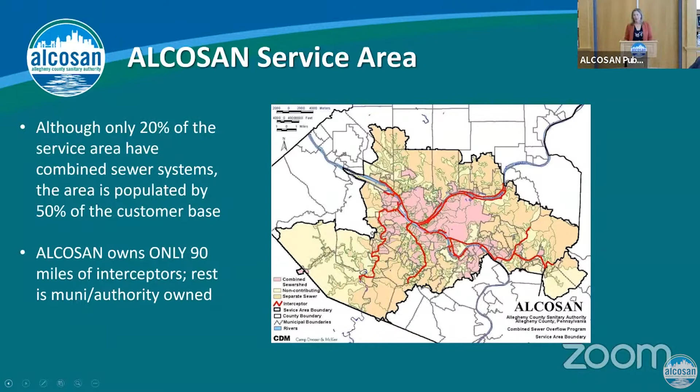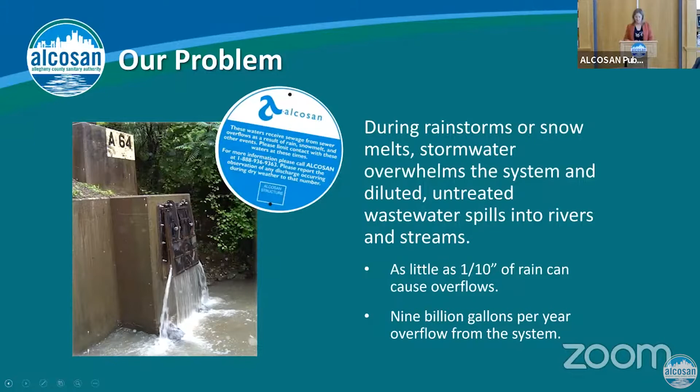Now you'll hear about our consent decree. And what does the consent decree require ALCOSAN to do? Well, it requires us to eliminate sanitary sewer overflows, and that's an SSO. Those are discharges from sanitary sewer systems. It requires us to reduce combined sewer overflows. Those are sewer overflows that are associated with combined systems.

And then it also requires us to continue to provide transmission and treatment for all of our customer municipalities. That is the crux of what our consent decree requires us to do. We have to capture those overflows that are now currently going to our rivers and streams.

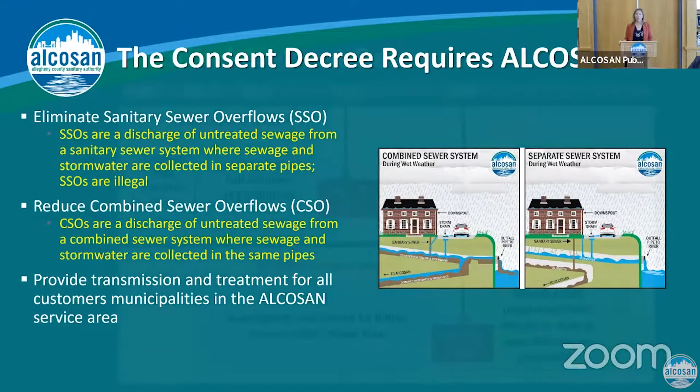And here is an overview of where we were during the original consent decree and then our modified consent decree. So we did have a consent decree in 2008, which would have required full compliance by 2026. ALCOSAN went back to the table with the agencies and we negotiated a modified consent decree. It bought us an additional 10 years. So now we have to complete this first phase by 2036. And it also includes some adaptive management provisions that are very important to our partner customers and municipalities.

There will be additional work after 2036. We are not going to be able to capture all 9 billion gallons with this first phase of the Clean Water Plan. So after we finalize this first phase on December 31st of 2036, then we will develop and implement the final measures plan beyond that date.

So you hear the modified consent decree, and then you hear the words Clean Water Plan. Well, the Clean Water Plan is our plan to meet the regulatory requirements of the modified consent decree. That's all it is. It's our plan to move forward with compliance. And it's actually been split into 4 pillars, which you'll hear much more about today during our annual update.

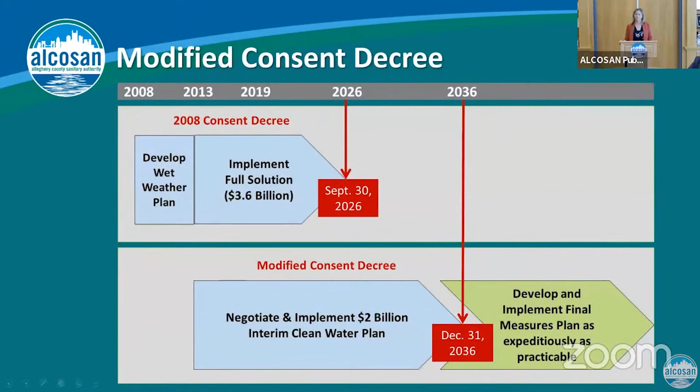Okay, so there's the plant expansion. There's the regional tunnel system to convey more flow to the plant, store and convey it for ultimate treatment. There's regionalization to help free up some of the burdens of each of our communities owning their own collection systems.

And then there's also green infrastructure, source control, and GROW grants to help communities get some of that unwanted water out of the systems that is causing some of the overflows. And remember, we also extended our completion date by 10 years and included provisions for adaptive management.

So with that, I would like to now turn it over to our Jeff Ardros to talk about the plant expansion and what we've been doing down here at the plant.

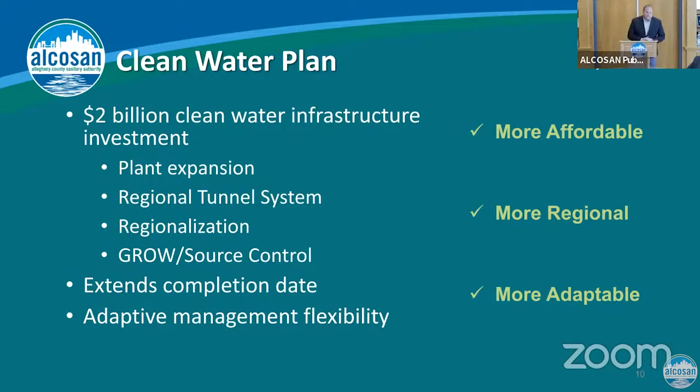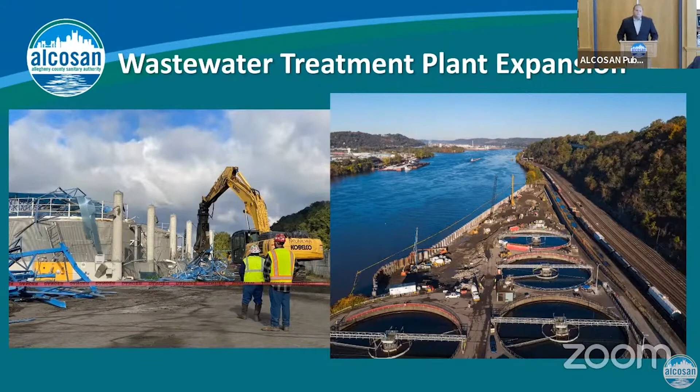And then the other item is providing 600 million gallons per day for wet weather capacity. And that number is 600 million gallons. As I said, our existing flow is 250 million gallons. So we're actually more than doubling our wet weather treatment capacity. And that consent decree milestone is due by 2029. So we will be doubling that capacity in the next 8 years.

Actually, not yet. Sorry. And the other reason I like showing this image is because it really highlights one major obstacle that we had to experience throughout this entire phase of the plant expansion, and it comes down to availability of space. So this is the extent of our entire property, and you can see on the east side, which is the bottom portion of the page, that is the Norfolk Southern Railroad. So we are bordered on that side by the railroad. On the west side, which is the upper portion of the photo, is the Ohio River. We're bordered on that side by the river.

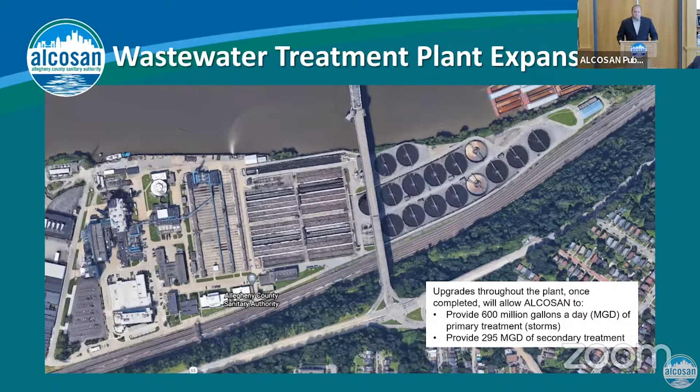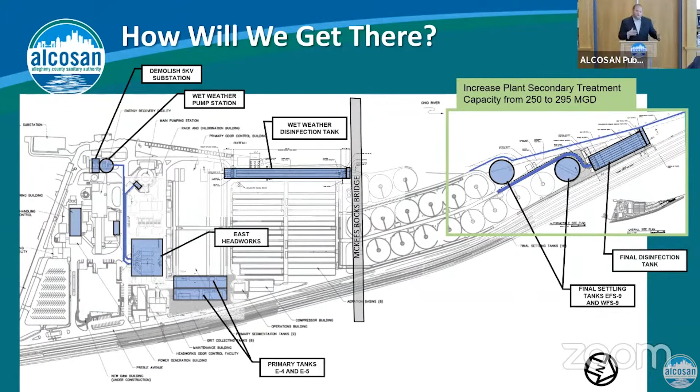So how will we get there? It boiled down to two bullets, but we have 4 steps. It starts with our north end plant expansion. And that will increase our secondary treatment capacity from our existing flow of 250 million gallons per day to 295 million gallons per day. So if you've heard of the north end plant expansion on our social media, or if you came out to the ALCOSAN open house and stopped by our booth, you would have likely heard about this project. It breaks down to 3 process tanks and then a river wall.

Next is our East Headworks project, which is another project that if you came out to ALCOSAN's open house in 2021, you likely heard about. And we will talk about both of these projects in the next slides. Next is what we call our CSO Bypass and Disinfection project. That is going to complete our ability to treat 600 million gallons per day through our existing chlorine contact tank. And we are going to be converting it to a bypass chlorine contact tank. And then finally, that last push is going to finalize that jump to 600 million gallons per day of wet weather capacity by building 2 new primary tanks and a wet weather pump station.

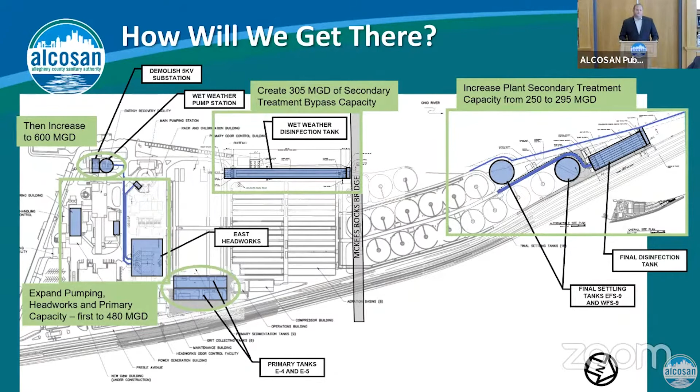So you can see it's about 1,000 feet linearly, and it's made up of 108 king piles, which are essentially pipes that are anywhere from 60 to 72 inches. So if you turned it on its side, I could stand inside one of them, and then there were 108 of them to build this river wall that's 1,000 feet in length.

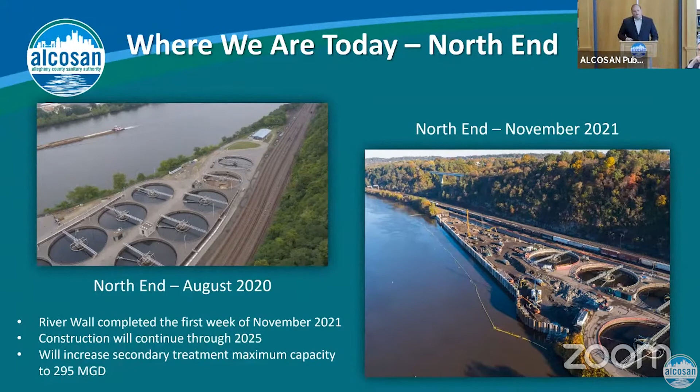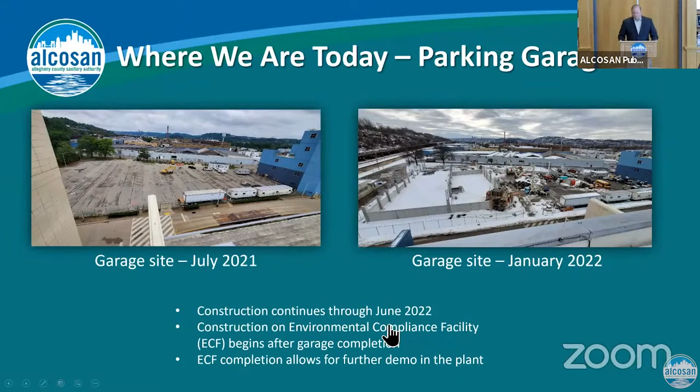A couple other plant expansion project updates. The return activated sludge project. Now this project really boils down to our forward flows are increasing. We're increasing our plant's capacity. So in order to keep up with that, we need to increase the bugs that are being sent back from our clarifiers.

Now, really what I can highlight about this project is if you have poked your head over the McKees Rocks Bridge and you've seen any of that above ground black piping that we have on the north end of our plant, that is the bypass piping associated with this project. So if you've ever wondered what that piping is, it is some bypass piping so that this project can occur.

The electrical distribution system upgrades project. This is a project that just went to construction in late 2021. So we're starting to break ground throughout our plant.

Why this is being highlighted is, again, it breaks down to that same obstacle we've been talking about: availability of space. We have a lot of projects going on, and what we plan to do with this area is locate our wet weather pump station there.

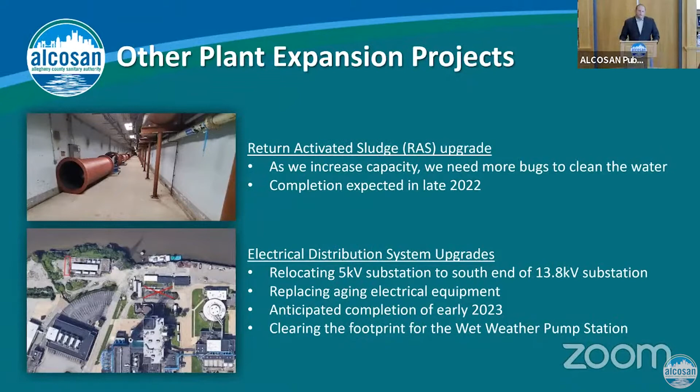You may be asking what the wet weather pump station is. This is going to be an extremely exciting project. It's going to be where 2 of the clean water plan pillars touch. The tunnel is bringing the flows to the plant, and it's going to end at the wet weather pump station. That wet weather pump station is going to pump those tunnel flows up to our East Headworks project, which we already talked about.

This project, we are going to be bringing a designer on board come early 2023 with the anticipation of hitting that consent decree requirement of 2029.

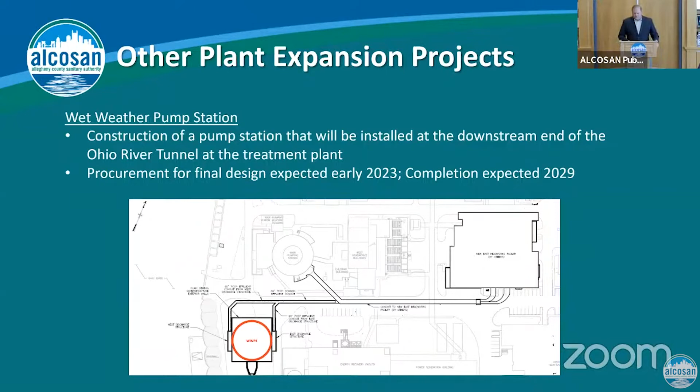If you've been on the ALCOSAN open house tour, you've likely seen this chlorine contact tank. It's being reconfigured to go the opposite direction to provide the bypass disinfection treatment process so that we can make that jump up to 600 million gallons per day.

Then finally, the last project that I'll be talking about is the Effluent Flushing Water improvements project. This is a project that will be going to bid towards the end of 2022. This project is going to be replacing some aging equipment within our system.

It's a sustainable answer to keep our water bills down and reuse water that hasn't necessarily been through the disinfection process, but it can deliver that flow to other areas in the plant for process reasons, whether it's flushing a tank or hosing a tank down.

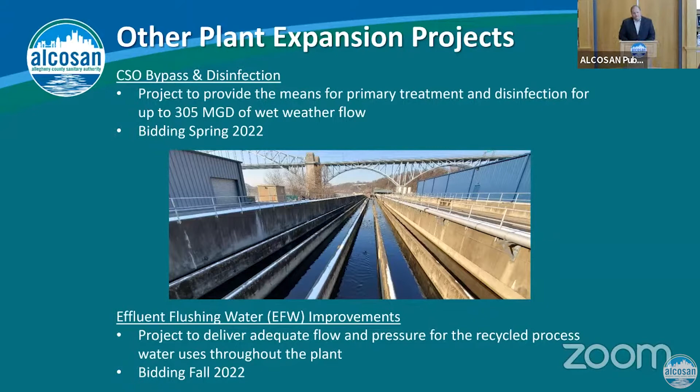With that, I am going to hand it over to Mike Lichter.

Thanks, Jeff. My name is Mike Lichter. I'm going to provide an overview of the regional tunnel system.

Jeff talked about one portion of the overall IWWP, the interim wet weather plan. The other component is getting the flow to the plant for treatment. That's going to be the regional tunnel system.

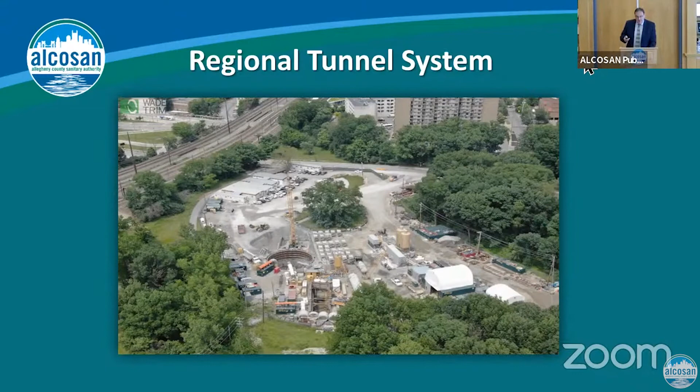The tunnel system will consist of 3 large projects: the Ohio River Tunnel, the Chartiers Creek Tunnel, and the Sawmill Run Tunnel. The tunnel will be approximately 6 miles long.

Oh, it's not doing that. Okay, as you can see here - okay, it's not going on.

There's going to be three tunnel projects: the Ohio River Tunnel, the Allegheny River Tunnel, and the Monongahela River Tunnel.

About 16.5 miles of tunnel containing a volume of about 160 million gallons. We're currently proceeding with final design of the Ohio River Tunnel.

Design for the Allegheny River Tunnel will begin in 2025, while design for the Monongahela River Tunnel will begin in 2028. During design of these tunnel segments, we'll be refining alignments to minimize surface disruptions during construction. Fortunately, most of the work will be done 100 to 150 feet deep in rock, so there will be no noticeable impacts except where we need to access and launch the tunnel and pick up large combined sewer overflows.

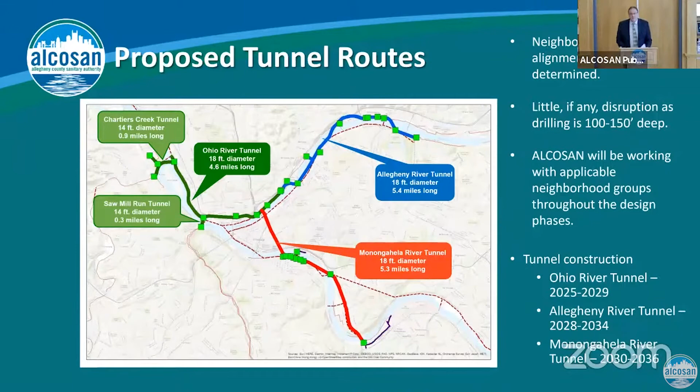New regulators will be constructed on combined sewer overflows, which will regulate flow and divert these flows to the tunnel. Likewise, new shafts will be required as a means for ingress and egress into the tunnel during construction.

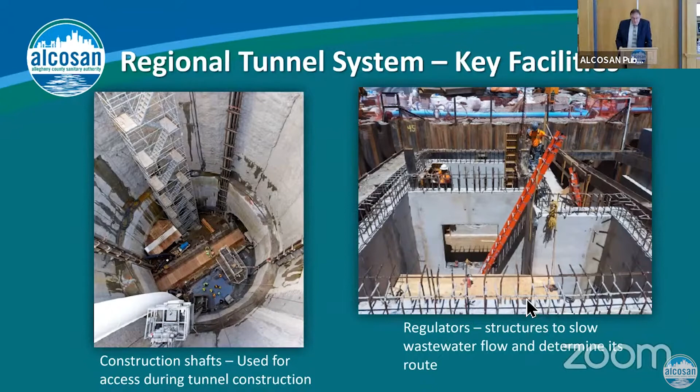New drop shafts will also be constructed on large sewer overflow pipes as a means to capture surface sewage flow and send that flow to the tunnel. Consolidation sewers would be necessary to send flows from the regulator to the shaft, to the tunnel, and then to the treatment plant for treatment.

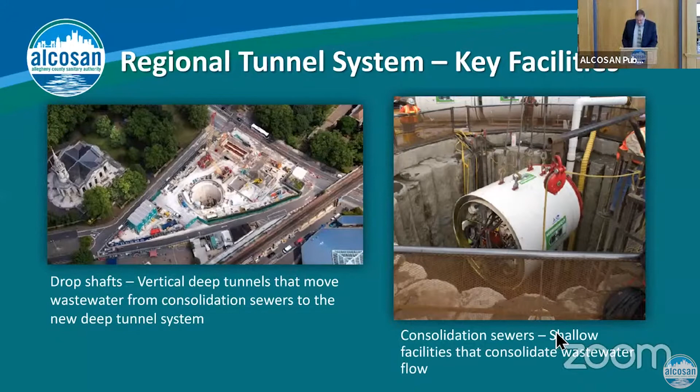What we're trying to achieve with this facility is to pick up these large sewer overflows, like Kim alluded to, that are currently discharging to the river and send them to the plant for treatment. Get the sewage out of the river.

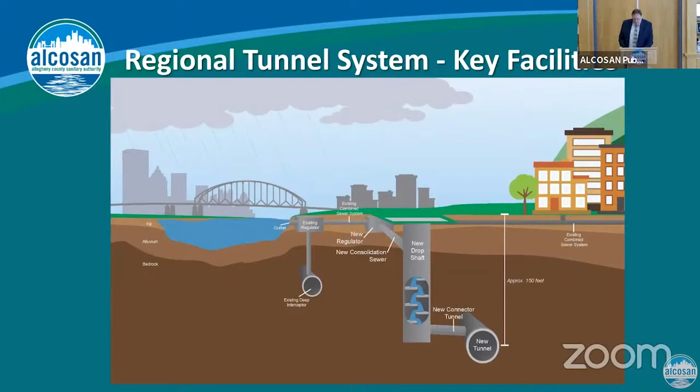So where are we? The State of Pennsylvania requires Act 537 planning for any large and substantial sewer projects. We are currently undertaking Act 537 meetings with municipalities where the current tunnel is located. That's a regulatory requirement. This step is necessary for us to be able to proceed with permits from the Department of Environmental Protection.

Our Act 537 plan document will be available for public comment in spring of 2022. We currently have the Ohio River Tunnel final designer selected, and he's begun preliminary work. We've also begun the task of acquiring property for tunnel and shaft sites and our preliminary alignment.

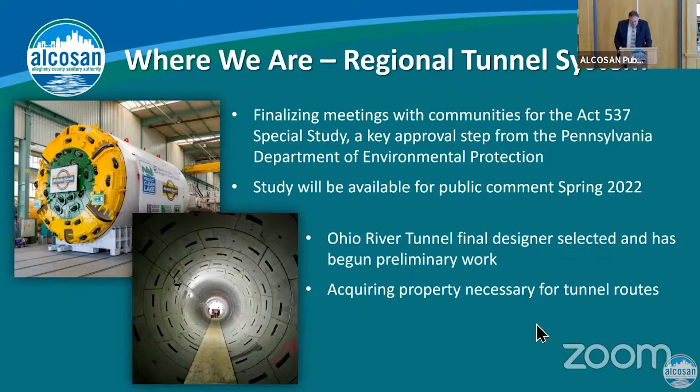With that, I'm going to turn it over to Julia Spiker, and she's going to talk about regionalization.

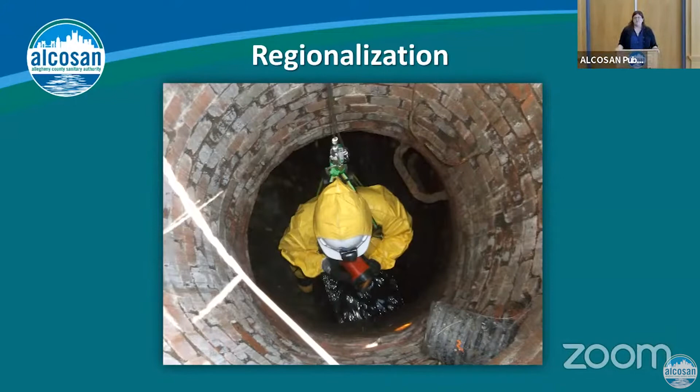The regionalization is one of the key pillars of the Clean Water Plan, as Kim mentioned. This component is the process of transferring the larger sewers and sewer facilities currently owned by the municipality to ALCOSAN.

The program began in 2008 when we engaged our municipal partners, their solicitors, and other key stakeholders about what criteria made the most sense for the region to qualify as being eligible for transfer. The result of those extensive studies was determining that any sewer that was multi-municipal, meaning it accepts flow from 2 or more municipalities and is 10 inches in diameter or larger, met the criteria.

As Kim mentioned, ALCOSAN currently owns and operates 90 miles of sewer. Under the regionalization program, as many as 265 additional miles could be transferred to the authority. Along those lines are 6,200 manholes and 77 diversion structures.

Diversion structures are simply points within the collection system where flow is routed to where there's available capacity, or is allowed to relieve itself through an overflow structure.

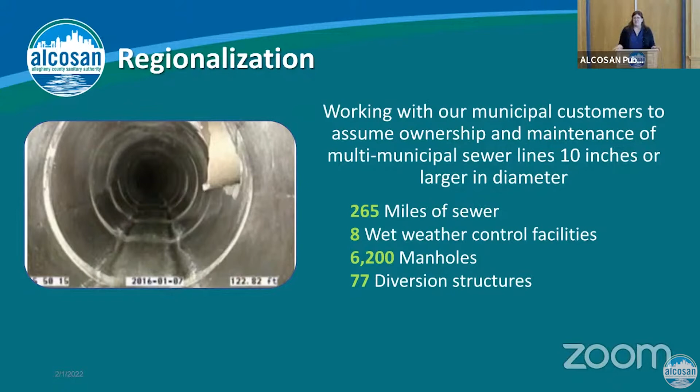There are 8 wet weather facilities. Those include 4 pump stations to help move flow to ALCOSAN for treatment, as well as 4 equalization basins that are also eligible for transfer. Those 4 facilities are designed to hold water back during wet weather, then slowly release it once the system has had an opportunity to recover, in an effort to reduce those overflows.

So this is a large undertaking, but it has many benefits to the region. First, it can improve the management of costs, maintenance, and future improvements.

We talked about the unique characteristic of our region being so divided by municipal boundaries, with lots of jurisdictional considerations. Under regionalization, we could establish a true regional system that is more comparable to what other similar authorities across the nation operate and manage. It allows us to operate a system as a whole, regardless of municipal boundaries, leading to more cost-effective and impactful investment in infrastructure.

Regionalization is founded in collaboration with our partners and our municipalities. That continues now through establishing the terms of those transfer agreements, working together on necessary repairs, and it will continue post-transfer as we determine what investment is needed in the system, regardless of location, but totally based off of the technical need for a project to be implemented. This is a key component of the Clean Water Plan because it helps us achieve regional water quality goals. We can operate as a single system instead of being limited to what each municipality has governance over.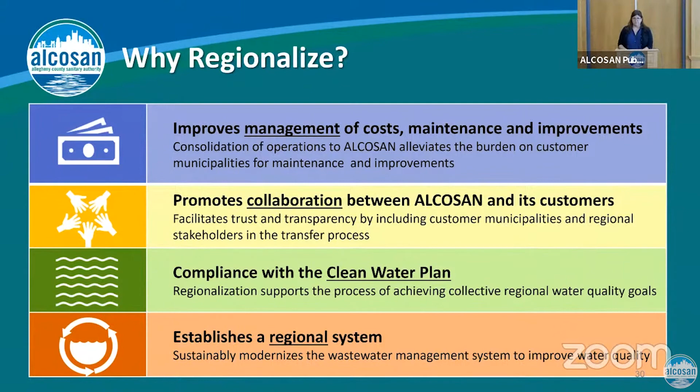We've reached an exciting point in regionalization, but it did not happen overnight. There are many people and partners that got us to this point. It all started over a decade ago when we began holding meetings with each individual municipality, and then larger groups, to develop what would be the criteria for transfer.

Once that was set, we moved forward with inspections. ALCOSAN completed what's called CCTV - basically, a robot is placed in the sewer and takes a video of each pipe segment. We did that on over 300 miles of sewers so that we could assess the condition of the facilities as well as identify any defects.

Defects that required repair prior to transfer were all documented and summarized in reports that were provided to the municipalities, along with the videos themselves. That way, the municipalities could make thoughtful investment and plan how they were going to do the repairs to complete the transfer process. We took a similar approach to assess those 8 facilities I mentioned.

We completed site visits, assessment looking at what needs were needed, what repairs were needed immediately, and summarized those in basis of design reports. We're meeting with the municipalities currently to talk about those repairs needed and collaborate on the best approach to move those facilities forward with transfer.

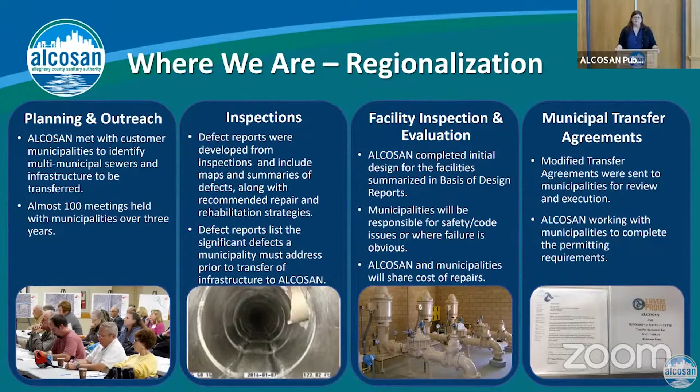The modified transfer agreements have been sent to all the municipalities. I'm very excited to see them moving forward with execution, and we're now getting to the place where we're working with the municipalities to complete the permitting process, which is one of the last steps prior to transfer.

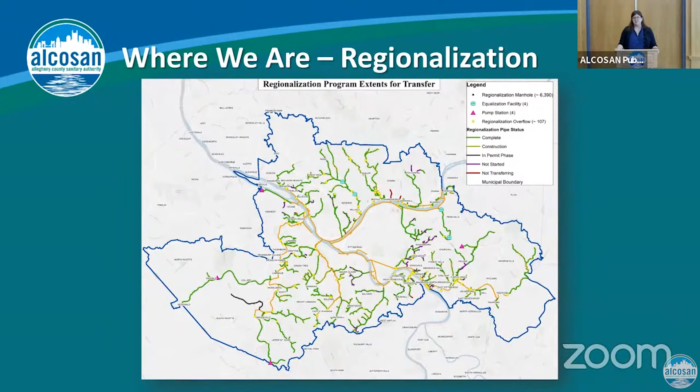Finally, there's the darker black color lines. Those are the locations where we're actively in the permitting process, and that, as I mentioned, is the last step prior to transfer. So tremendous progress has been made on this program, and we look forward to continuing to work with the municipalities as it advances. With that, I'll turn it over to Tim to talk about ALCOSAN's source control and GROW programs.

Thank you, Julia. Here to talk about the source control program and GROW. GROW is ALCOSAN's financial incentive program, helping municipalities implement their source control projects.

Leading up to the GROW program, source control had numerous challenges. One key challenge was property ownership - ALCOSAN did not own the properties for us to implement source control projects within our customer municipalities. The jurisdiction, being with the municipalities, made these source control projects the realm of the municipalities. With the age of the infrastructure never clearly getting younger, and as Julia pointed out, several defects throughout the system, we needed to find a way to address the region's collection system and the water getting into it. Our topography and soil conditions were very difficult to overcome to implement large-scale green infrastructure.

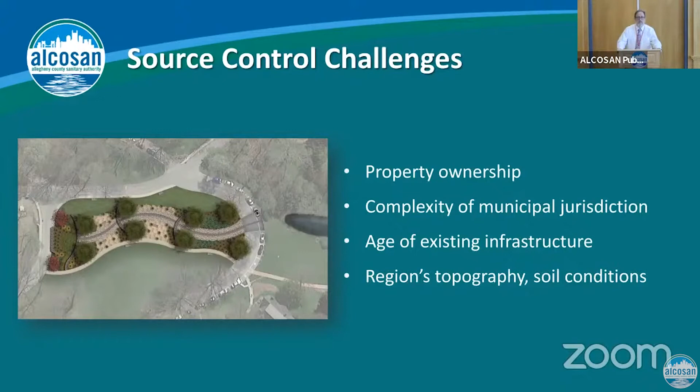So in 2016, the ALCOSAN Board of Directors authorized the GROW program, the Green Revitalization of Our Waterways program. The goals of the GROW program are to construct projects through our customer municipalities that reduce sewer overflows and also reduce the amount of stormwater entering into the regional collection system. These projects will help the municipalities support their regulatory requirements, along with helping ALCOSAN meet our goals of the consent decree.

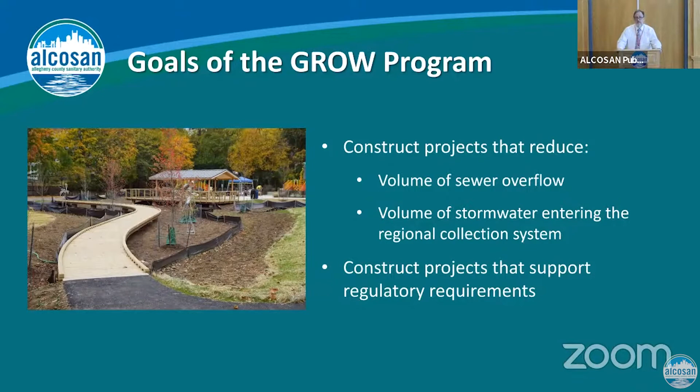Some program requirements for GROW. Not everybody can apply for GROW. You must be either an ALCOSAN customer municipality, as Kim pointed out earlier, there are 83 of them, or a municipal sewer authority within the ALCOSAN service area.

Each project must demonstrate cost effectiveness. So the cost efficiency of reducing the amount of sewer overflow or the amount of flow entering the system is a key component into determining what the match is for the GROW program. Each applicant must own the site that the project is on or have the legal access to that site through an easement or any other legal means.

The applicant must perform flow monitoring or any kind of monitoring to assess project performance. Again, this is a key component to determining how much a project would get matched. And finally, after the project is done, each applicant accepts a 20-year O&M responsibility for that project.

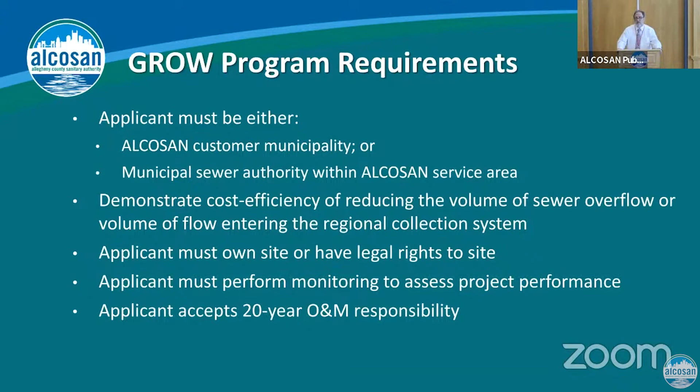There are 4 types of GROW eligible project types that reduce source flows. We have green stormwater infrastructure. Green infrastructure is a way to mimic the natural environment in capturing water and sometimes infiltrating it or sometimes bleeding it back into the sewer system to reduce the peak. Direct stream inflow removal. There have been situations throughout our sewer history where streams are going into a combined sewer. We are trying to get those streams out of the sewers.

I&I reduction, as Julia pointed out earlier, there are sometimes defects in the sewer systems that allow infiltration to come into the system. We want to remove that water. And finally, sewer separation, combined sewer systems that can be effectively separated, allowing the stormwater to not enter into the combined system and be routed towards a waterway.

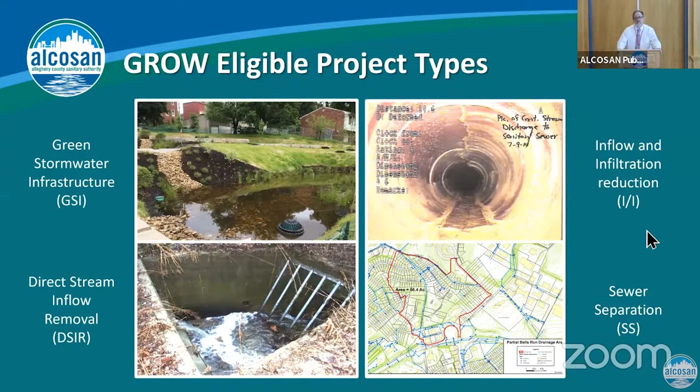So we had just completed awarding our 6th cycle, and today we are starting our 7th cycle with letters of interest to our customer municipalities. Through the 6 cycles, ALCOSAN has the potential with our customer municipalities to remove over 200 million gallons of overflow per year. The amount of money that we have awarded is in excess of $60 million in grants. And we have approximately 140 active projects, and 51 of those projects currently have been completed and have provided final reports to ALCOSAN.

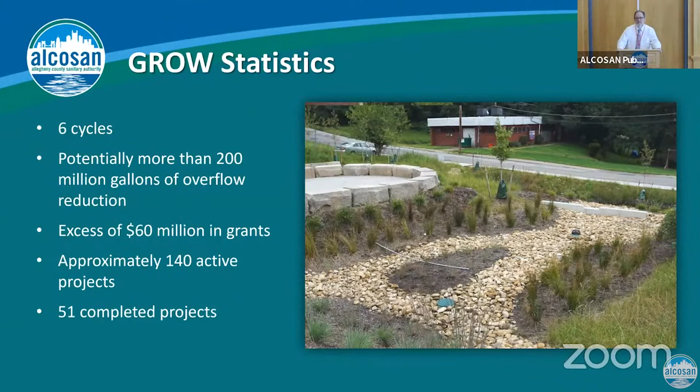Another document that ALCOSAN had produced in 2020 is Controlling the Source. This document was used to help the municipalities identify where source control projects could be placed within their community. These documents are on the ALCOSAN website, open to the public. We have an executive summary for those who would like to get the quick overview. We have the full report for those who really want to take a deep dive. And we also have a web map. That web map will show you where the potential projects could be.

We also have a web map for the GROW program. And this allows you to take a closer look into the ALCOSAN system and see the constraints and the opportunities that are available throughout the region.

So Controlling the Source is a science-based document that evaluates source controls. We include cost estimating guidelines that we provide to the municipality to help them understand what could be a cost-effective project, and also identify any opportunities that are out there, and also what are the constraints that might not lend itself to a cost-effective project. Controlling the Source also identifies some opportunities for leveraging additional funding.

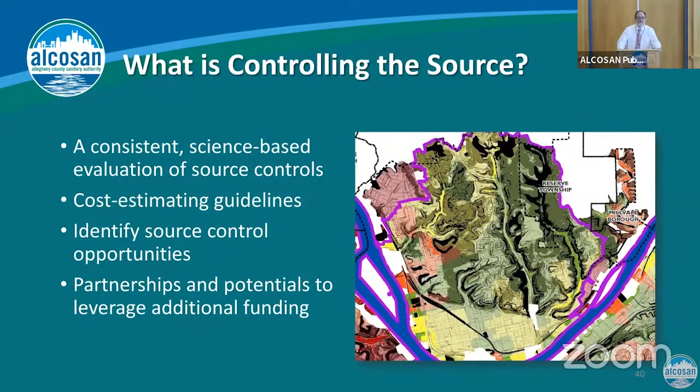And finally, to wrap this all up, I would like to introduce Arletta Scott Williams. And because I wanted to make sure we wrap things up with oomph, I am now going to introduce our Director of Environmental Compliance, because that's why we're here. We are here for environmental compliance. Michelle Buys is going to wrap things up and take you through the Q&A section. Michelle? Thank you, Arletta. Get back on the slide.

Okay, so what we heard today was a lot of information on the design and the construction, which is where we're at today. And we also heard about regionalization and GROW. So a lot of the plan that we have is adaptive, and that is built in our consent decree for the purpose of allowing us to change the plan as we roll along in the future.

You saw the schedules. We have a 2036 deadline, and then we have beyond 2036. So the programs that were described today, such as, as Tim shared with us, Controlling the Source, the GROW project, and regionalization will all be long-term projects that will help us and allow us to be adaptable as we move forward.